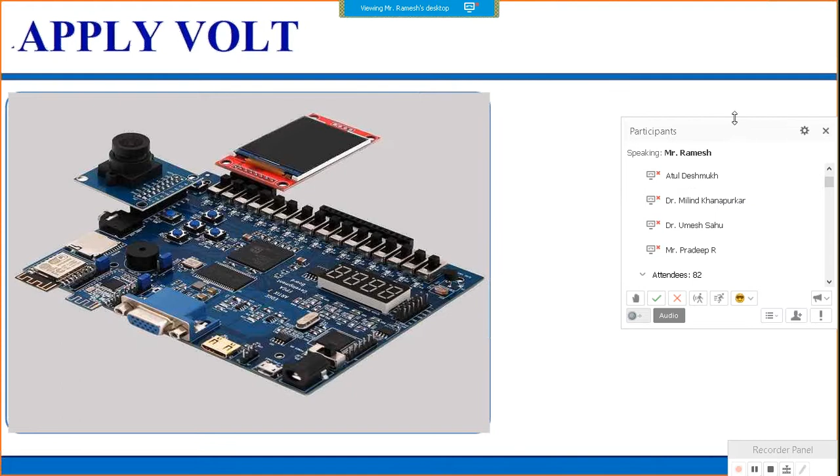And the major advantage, when we compare with Digilent and Xilinx boards, is warranty - that is a major issue - and the other is the peripherals. The third part is DAC and ADC, both present on this board. And on this board we have 3 flavors: one is Spartan, other is Artix, and the third one is Zynq.

And LoRa is one thing which I was just about to tell you. This is one of the products which we have designed in the month of June, using Raspberry Pi, FPGA and LoRa solutions. We have implemented this in our office, as well as in most temples, malls and airports.

Initially people were not ready to go for it, but we told them, okay, maintaining the distance, an alarm goes off, and you get alerts for those who are not wearing a mask. So everything is noted. Recently we have uploaded the thermal part also, which within 6 feet of distance will tell you the person's temperature. I won't say it's 100% accuracy as of today, but 90 to 95% accuracy data is coming.

We have already implemented this in a couple of municipal corporations in different cities like Vijayawada, Vizag, and in some hospitals. This completely uses the LoRa technology.

This is one more thing, a LoRa-based animal tracking system which we did 1.5 years back in Madhya Pradesh, in one of the forests, where near the fencing so many animals come in, and sometimes electric circuits are given in the fencing to deter them. To avoid that, we have given this animal monitoring using LoRa technology there. We have put it on a trial basis, expecting something good should happen. This was our effort for the last 1.5 years, which we've been showing to people.

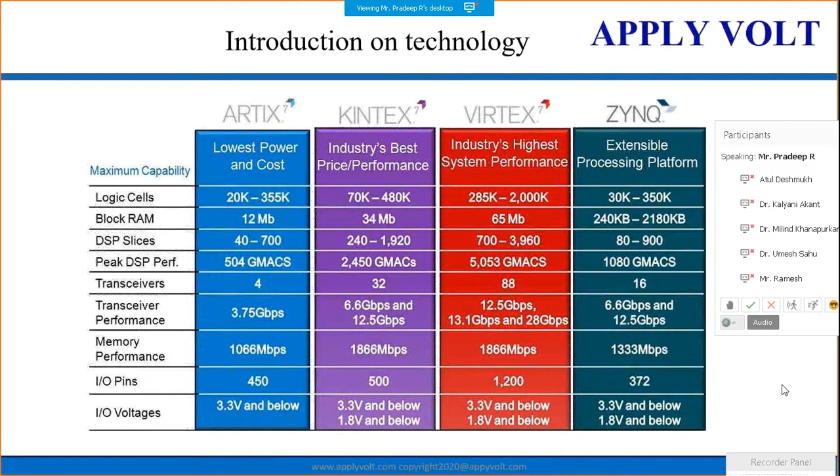Every 18 months, we are concentrating on increasing the device in terms of area point of view, we can take it 2 into 2. For example, if you take a die with a dimension of 2 and 2 nanometers, you can identify that in terms of nanometers. Here, the die size consisting of 2 into 2 is a square base. In that, you can fit certain designs, like full adders or full subtractors, or you can include microcontrollers or microprocessors.

After 18 months, what will happen? The die size must remain the same, but you can fit into it 2 parts, one microcontroller and another microcontroller. We are having 2 microcontrollers by using another 18 months or 2 years. This is defined by Moore's law, so the reason behind that is the technology file. That's why we are concentrating on present trends in 7 nanometer technology files.

So coming to that, by using these 7 nanometer technology files, which are very low-end technology files, what are the different changes in our FPGAs that have happened in the past 10 years? We can concentrate on the architecture of FPGA boards or FPGAs available in the market. So these are the different technology files.

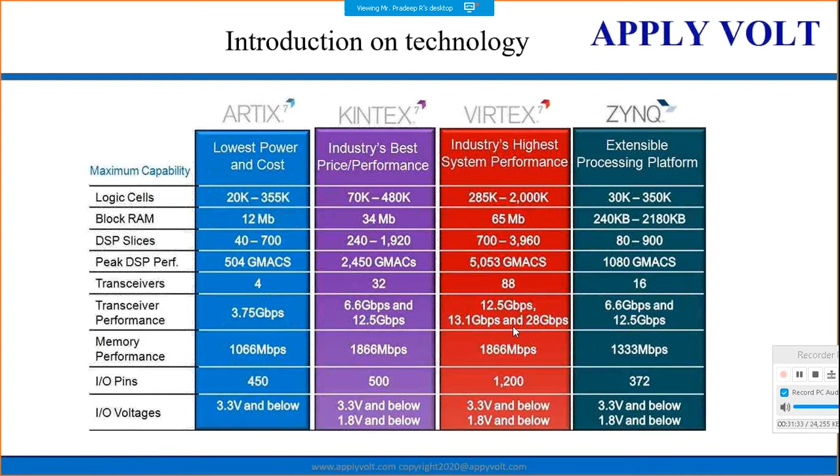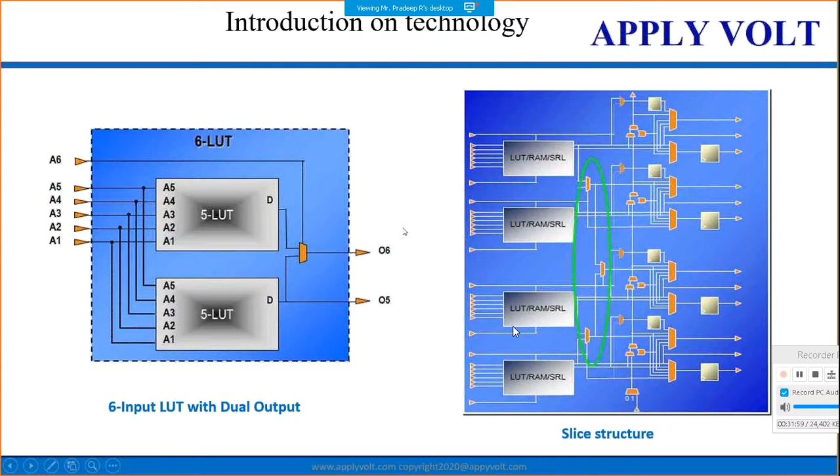Coming to DSP slices, why are DSP slices very important in FPGAs? While performing image processing applications, signal processing applications, noise applications, or video processing applications, we need certain registers to store and retrieve data using this DSP application. So we have a dual port DRAM register and AB registers, another type of multiplier for 25 into 18, and an adder multiplexer. ALU is also available, along with mux, counters, registers, and carriers. Using these fundamental bits, we support our design in terms of DSP slices. So the configurable logic block consists of both DSP slice type and logic slice type, as we can call it.

So these are the technologies inside the FPGA that we are focusing on. We are always focusing on ZedBoard, which is one of the best boards available in the market. It is good for applications like SOC, system on chip, because this board consists of both logical resources and system resources.

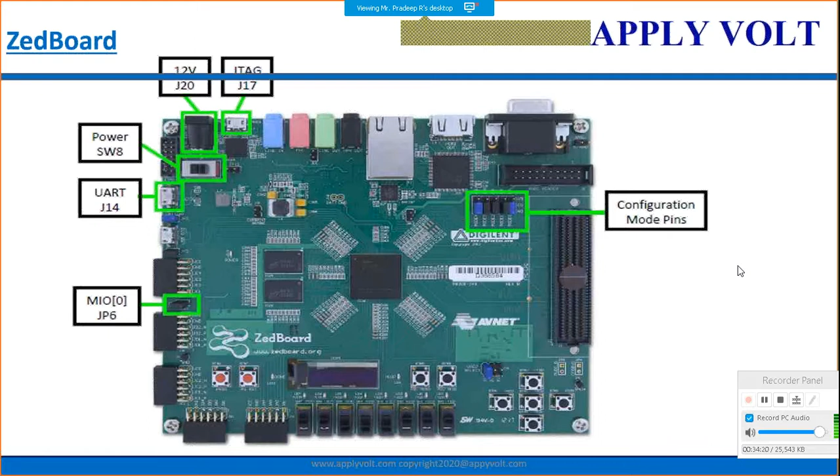That means PS and PL, processing system as well as programmable logic. One of the programmable systems is constructed using ARM Cortex A9, a dual core processor, and the PL system is constructed using an architecture of Artix 7 and Kintex 7, as we saw in the previous slide. These PS and PL communicate using an AMBA architecture, that is AXI4, which is used for prototyping applications, for the communication between both PS and PL.

So what's coming up here? We are starting with where to start and where to end. So I'm giving some individual steps, a design flow, you can call it as design flow.

You can see what is what and where to end and where to start.

Initially we want to identify our problem statement, that means what we want to design, what type of application we want to design. For example, edge detection, pixel clarity, or enhancement of the image. Like that, you want to identify what is your problem statement.

Later on, we come to define our verification by using different architectures and applications. What are the verification domains we want to do initially? For M codes, like MATLAB codes, you want to write your own MATLAB code for your different architectures or problem statement.

And you verify that the enhancement or design is properly working or not, also by using another type of module like Simulink modules, where you can easily drag and drop your Simulink block set and enhance your design. This type of analysis is very important.

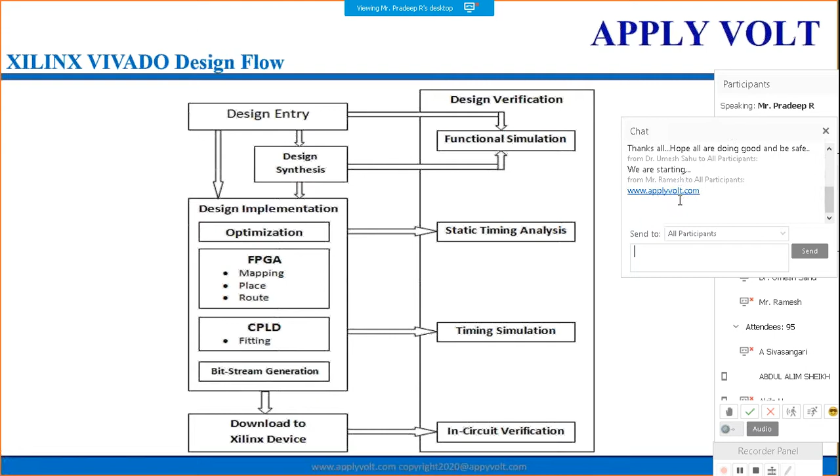design flow of Xilinx. So we are concentrating on these steps for the coming lab.

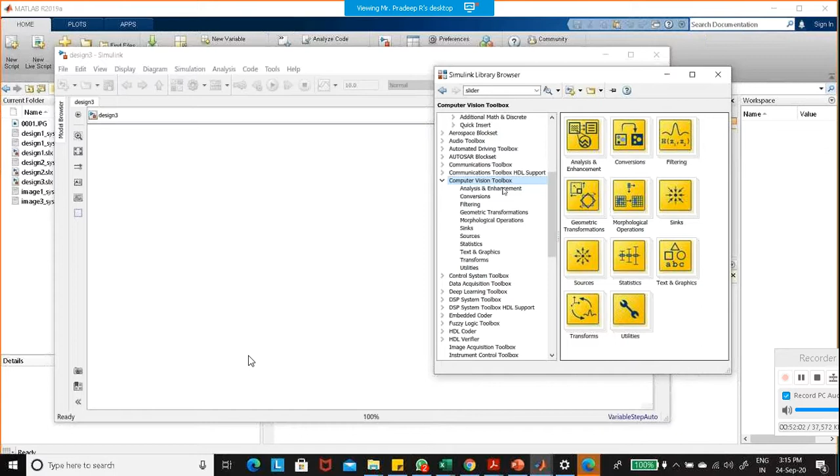In that toolbar, you want to give in some source, meaning you are giving an image. In the source window, you go for Image From File.

You take this toolbox, drag and drop it. Now the image block has happened.

Later on, since the image is in terms of rows and columns, like 128 by 128 or 750 by 750 RGB color image, for the resizing purpose, you want to go for resizing.

Why am I going for resize? Resize is very important because I'm giving a certain image in a bigger manner, and I want to convert that image into a different form.

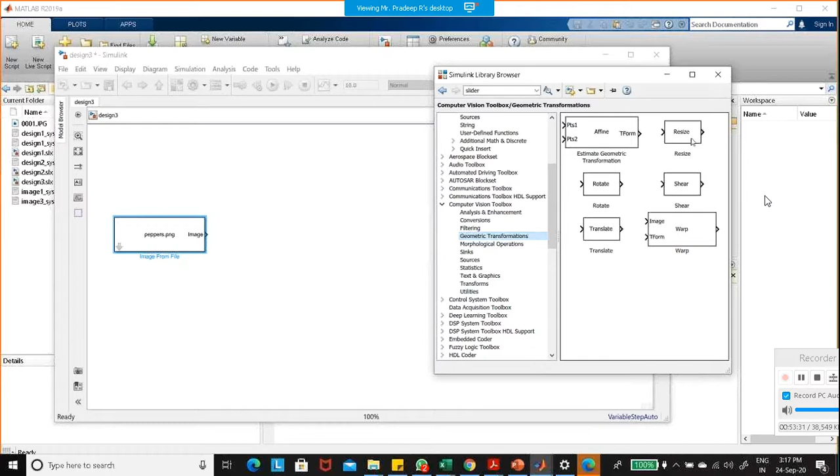So in the same Computer Vision toolbox, go to Geometric Transformations. There you have Resize, so you can take the Resize block.

After resize, you want to go through the conversion, because the image is in 2D. For the conversions, this exists in the same toolbox - you go for the DSP toolbox.

In the DSP Toolbox, there is Signal Management, and within that, Signal Attributes. In there, we have two types of blocks: 1D to 2D and 2D to 1D.

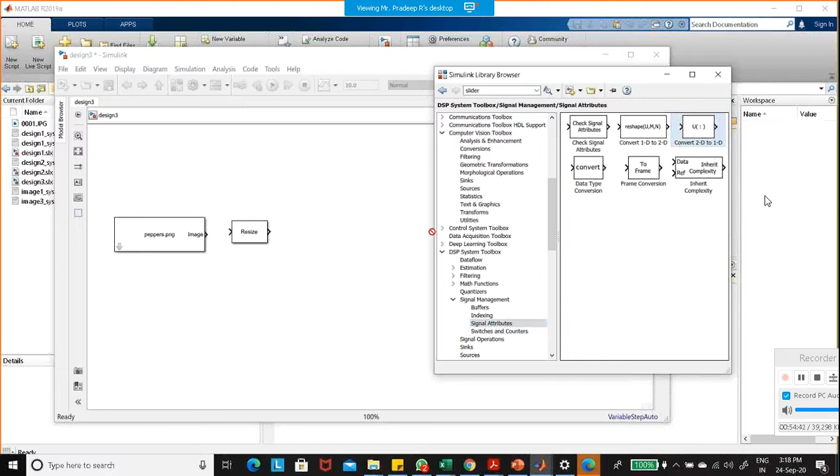I require both these blocks - one for 2D to 1D, another for 1D to 2D. One goes in the pre-processing block, the other in the post-processing block. So I take one here for processing, and I also take the other right now for the post-processing block.

After that, in the same attributes, we have a Frame block. I want to transmit my image frame by frame, so for that I'm using another block called Frame Conversion.

Later on, I want to use buffers - Unbuffer and Buffer. These hold the entire sample of data. For example, if I give a resize of 128, the entire 128 comes directly into the frame.

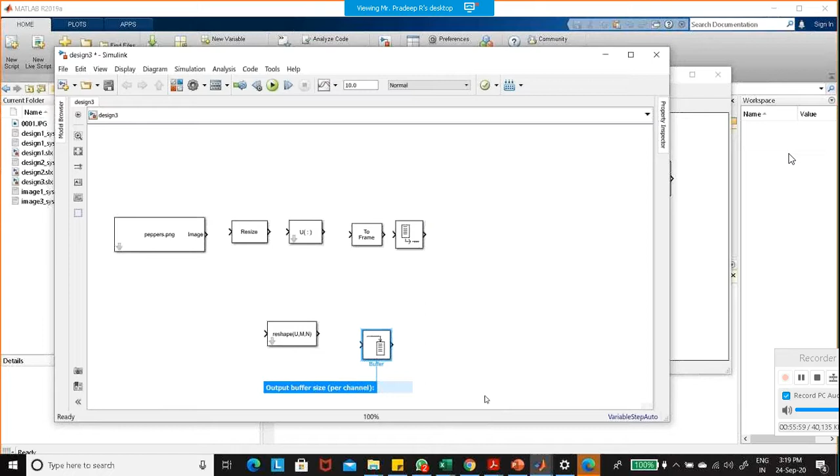The frame is directly sent to the input, but the input cannot capture the entire data at once, so it will hold a certain amount based on the resize type. That's why I'm using a buffer - I require another type called Unbuffer as well. That is only the buffer, and it is in the pre-processing block.

Later on, you can make a simple connection directly - this is my pre-processing block.

Now that the processing block is completed, what's the next step? You want to make a certain algorithm. So here, I want to do the algorithm in terms of addition - I want to add a certain constant value to my image.

For that, I am going to the library. The algorithm has been designed using Xilinx System Generator, so I am going to the Xilinx toolbox block set. This is my Xilinx block set.

When you configure the Xilinx Vivado to MATLAB only, this block is available - otherwise it's not. In that, going to the Basic block set, I want to take my input as well as my output. These are the two things I want to drag and drop.

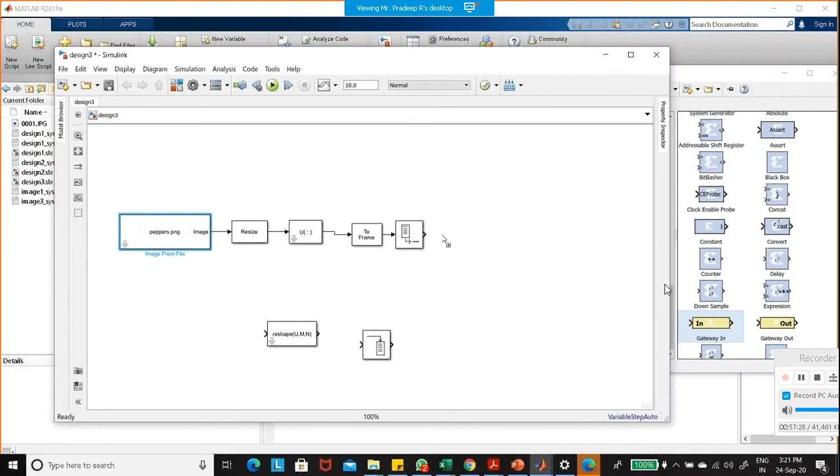So this is my input signal and this is my output signal. So in between input and output, what I want to perform? I want to perform adder.

So for the adder block, where is the adder? Actually, adder is in terms of math. In math library, we are having adder subtractor. This is my adder. So I am taking the adder subtractor block from the math library, and I am giving the connections.

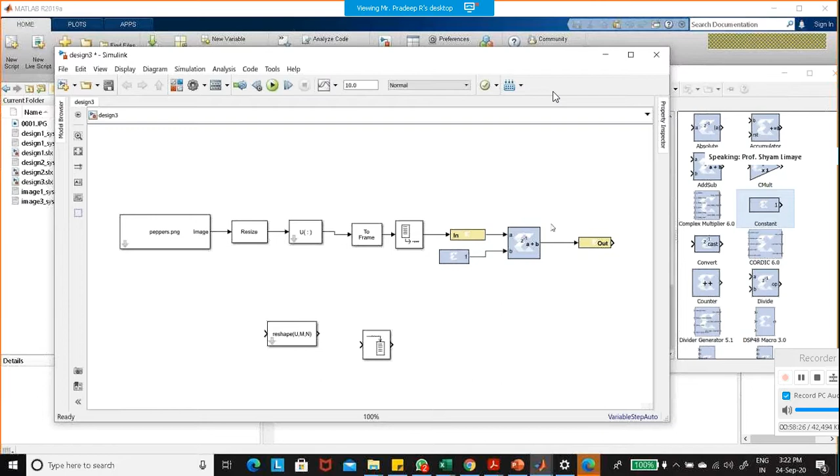So later on, I want to take the parameter also. I want to take the constant also. So this is my constant, from the same math library. Some connection here, so giving all of that, I completed my second block set, that is system generator.

I want to perform an algorithm in terms of adding some noise or some signal to my design. And later, I want to perform a post-processing block.

So for the post-processing block, I am already having one buffer. So what is the data I am having? The same data I want to unbuffer it. And I want to retrieve the values from one form, 1D to 2D, because I want to view the same image in terms of 2D form. So I want to retrieve it.

And I want to view my output. So the output is also existing. Going for that, going for that computer vision toolbox. In that there is a sink is there. In the toolbox we are having a video viewer. So take this toolbox and you can give it in the output side.

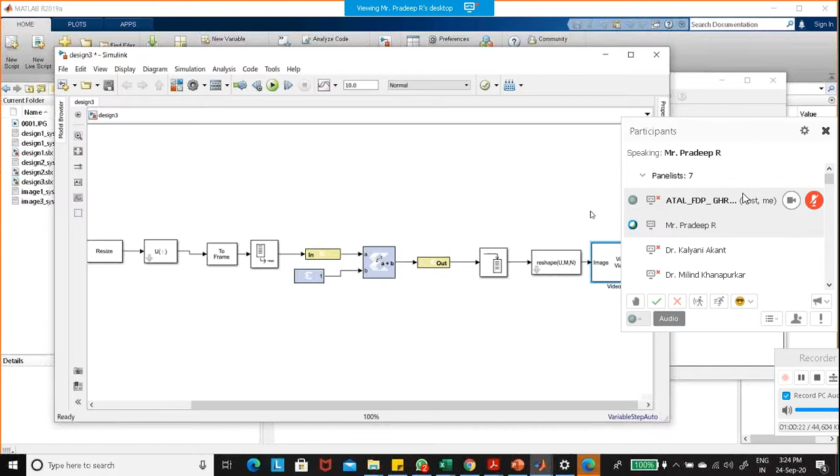Right, so this parameter, devices and everything we can connect. But in between, we also connect that data type conversions, because what is coming to you, what type of data is coming, in terms of binary form or in terms of radix form, like that. So for the confirmation, you can go to that.

So the signal attributes here, in the Simulink there is a signal attributes toolbox. In that toolbox we are having data type conversion. So you can take that data type conversion also. It is attached in between the output port and as well as the buffer. So I want to add this block also.

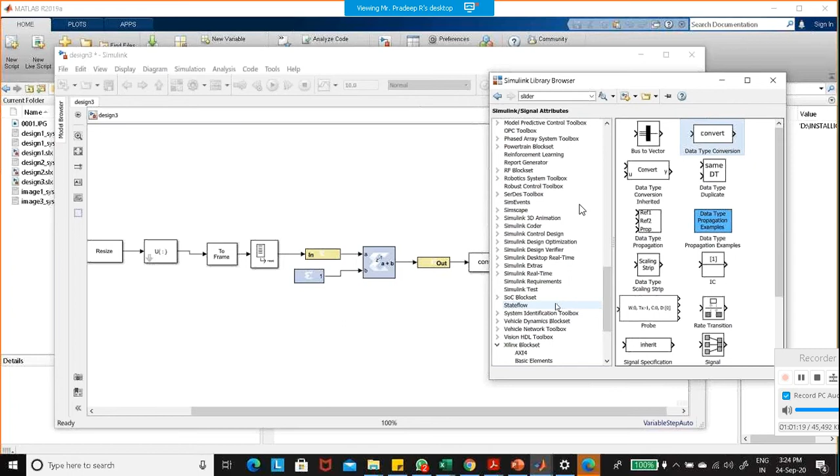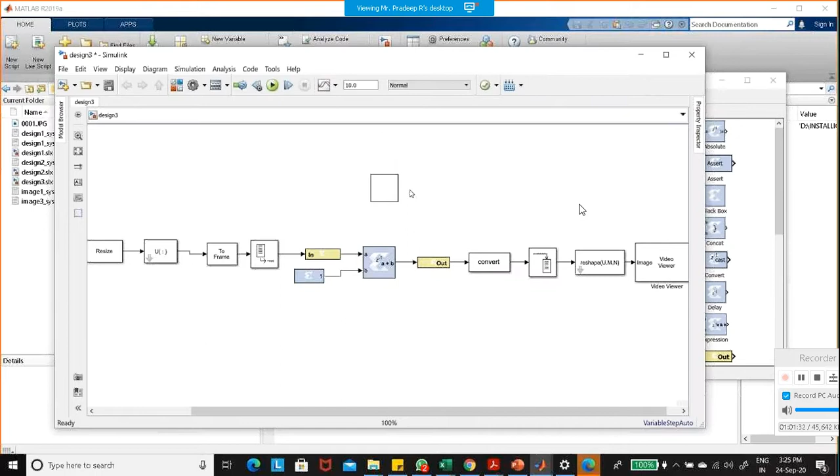Right, so this is my actual block. Meanwhile, I want to add my system generator also. So the system generator is existing in where? Actually, it is existing in the Xilinx block set. So in the basic block set, there is a name called system generator icon. This is the thing, all the operation has been done by using this block. Okay, system generator block, this is the compiler block, you can call it, or specification block, call it. So, okay, very good, fine.

So I want to view what are the individual parameters I want to insert right now. So I want to insert some image here. For that image, I want to make some resizing here. After that, I want to convert from 2D to 1D. After that, I am giving it in terms of frame by frame.

Frame by frame. Later on, the unbuffer is also going to the input side, and I want to add some addition or subtraction. Later on, I want to replace the data. So what I want to do? I want to take another image file, Control C and Control V.

Yes, this Control C and Control V. What is the input and given? I want to view. So for that input purpose, I am viewing the viewer here, video viewer here. So you can open and change the parameters for the design, okay.

So when you click on the image from file, the from file is mainly consisting of file name and what type of data it is. And actually, if you change the image signal in terms of separate colors like RGB, you can use the R to one type of signal, G to one type of signal, and B to another type of signal also. But I am taking right now, it is in one multidimensional signal. That means I was taking the entire data, and I am browsing my file.

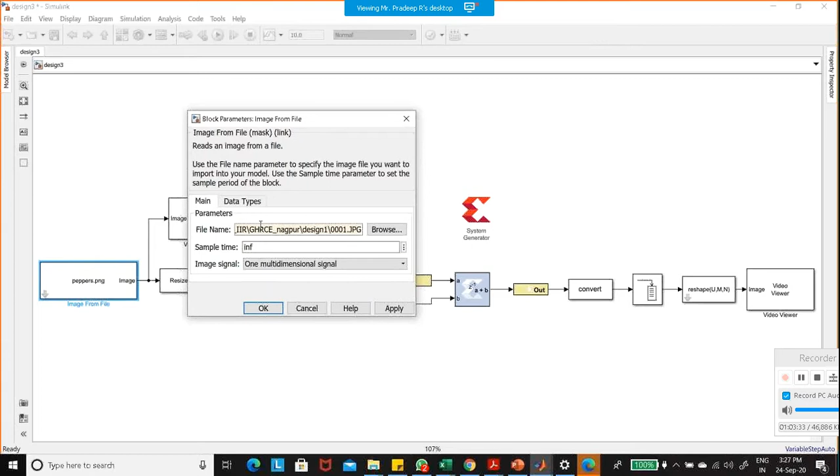That means I am giving my image file here. So I am having one image here. I am taking the same image. So then I am applying this one. Later on, I want to change my data type. Because data conversion is there, I want to choose what type of data conversion.

I am using the uint8 data type here. And now, after completion of this block, I want to go into the resize block.

So here, the resize block is consisting of so many specifications. You can identify specifications like the number of rows and columns, what you want to display, and what type of image wants to come into the screen. So I am taking the rows and columns of the image.

So here I am changing my value into 128. Rows means 128, column size is 128. Like that I am changing here 128 and 128, and you can apply.

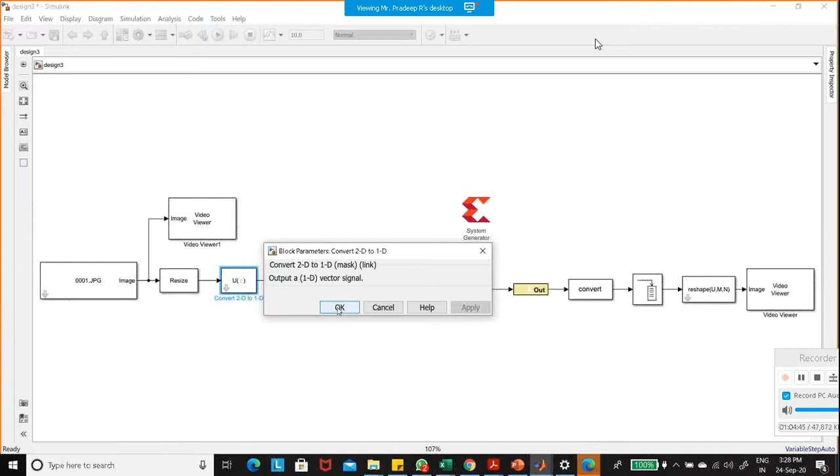So these are the same things because you are changing the vectors in terms of 2D to 1D form, and the frame size is also okay, frame by frame. But coming to the buffer, how much of data you are taking? So what is the size I given for resize?

The column size is 128. So you are taking the column in terms of two columns, rows and columns. It is 128 into 128. But coming to the unbuffer, I am only having to insert my data or insert my information of pixels in terms of 128 form only, because the frame I am giving is 128. Insert it 128 and click apply.

Okay, then I want to change my input gateway in. What is the gateway in I want to conversion? Yes, I am using for fixed point in terms of unsigned integer, and it is in terms of 8. So for 8, that means 8 bits, you can consider it as an 8 bit, and click OK and OK.

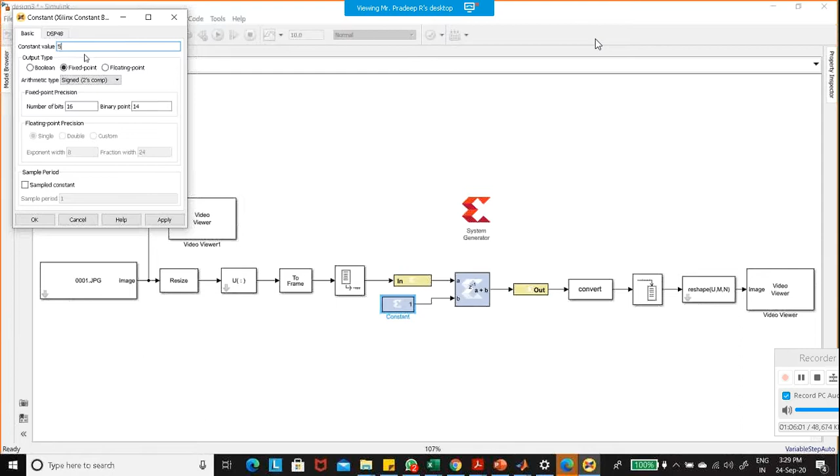Apply and OK. Okay, if you want to, I want to add some constant as I mentioned previously. The constant is maybe right now I'm taking 50. Later I can change any value according to 50 or some factor. You can easily identify, and also it is a fixed point, not a floating point, and it is a type of 8. I'm taking an 8 unit.

Okay and OK. And I'm adding here, and add only adder. If you want to take the subtractor or add a subtractor also, no issues. And I'm not using any delay here. Latency means here the delay, Z power minus 1. That is a latency. It is having 1 unit of delay.

So I'm taking it as 0. I'm not applying any delay right now. And the output, I'm not changing any output right now. It is only the same thing. Click and OK. Now, what about the conversion? Data type conversions, what is it?

So if you are going for the data type conversions, you can see in the property window you want to identify the output data type, what type of data it is coming, or you can take it, you can identify. So the data type is in terms of uint8, and it is a real world value, and you can take it as a round. Okay, click apply and OK.

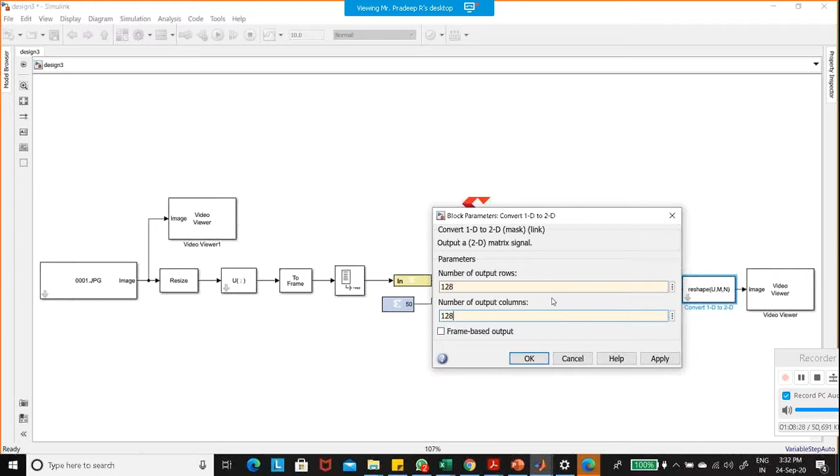128 rows and 128 columns. 128 rows and 128 columns. And click OK. So I want to view my output in terms of 128 into 128 form.

Then I want to save the design, because all the changes have been done. Still I am not using my system generator right now. Okay, but I am clicking on run to verify whether the output is coming or not.

That is going on, processing simulation is started. Yeah, everything is all in input and output. Yes.

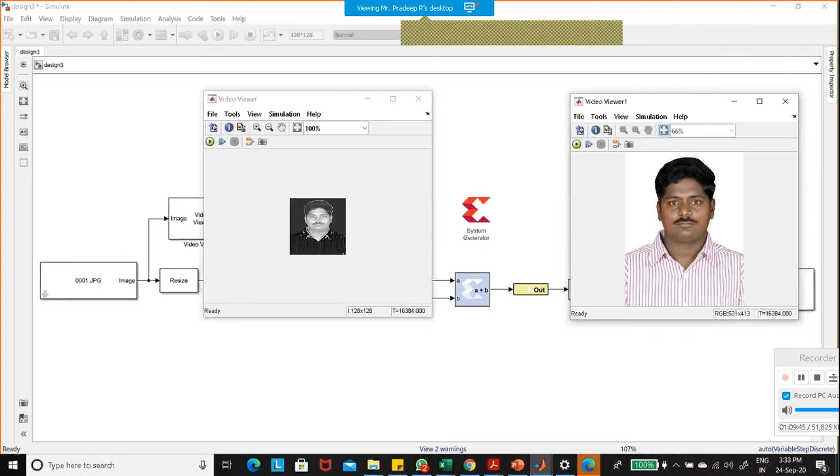Yeah, very good. So actually this color image, you can observe that this color image, what you call the actual RGB size, what is the size here? It is 531 into 413. This is the size of my image, and what I'm retrieving on the output side, you can see the retrieving of the output image. What is the resize? You can observe that 128 into 128.

Okay, so here you can see the size here, 128 into 128. So sizes have been taken.

The same size has existed here. If you want to change something different, for example, I want to invert my image - yes, you can invert your image. I'm giving some small examples very quickly here, and later on I'm going to the FPGA implementation.

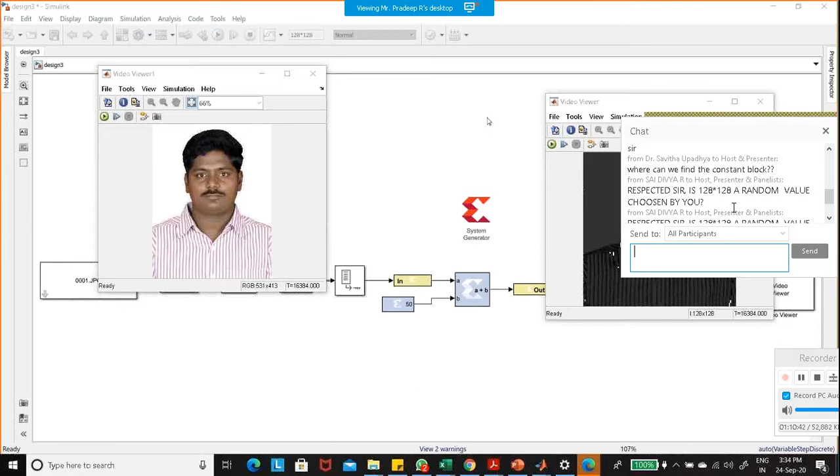From Sai Divya - yeah, ma'am. You can take the random value, like 64 into 64, or you can take anything according to your size. First of all, you want to know what is the actual image size. My input image size is 531 into 413, so that's why I am taking it like this. You can take it like that.

How can I run the MATLAB script into FPGA? I'm coming to that example, sir. I'm showing that - give me time of 1 or 2 minutes.

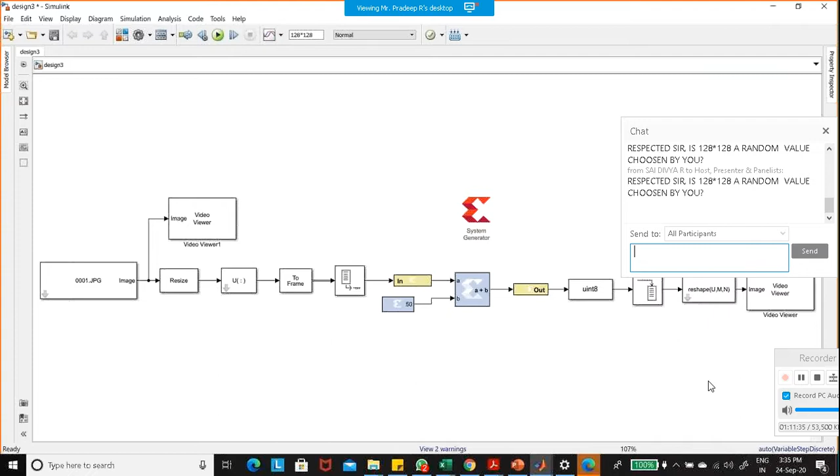If you want to see some other applications, for example, you can take that inverter in place of adder. You can take the inverter directly by using your block diagram library in that Xilinx worksheet. We are having an inverter here - where is the inverter? Just a minute, yeah, this is an inverter.

You can take the inverter, then use another type of application. For example, I'm taking that inverter, showing a small example, and I want to implement it in FPGA. For that, I require the input control C and control V - same things I'm using here also, and I want to use the same input signal and output.

I want to use the same data here. So I want to see how many images right now - I want to view 3 images: one is the input image, and 2 are output images. So for the output images, I want to change this property also.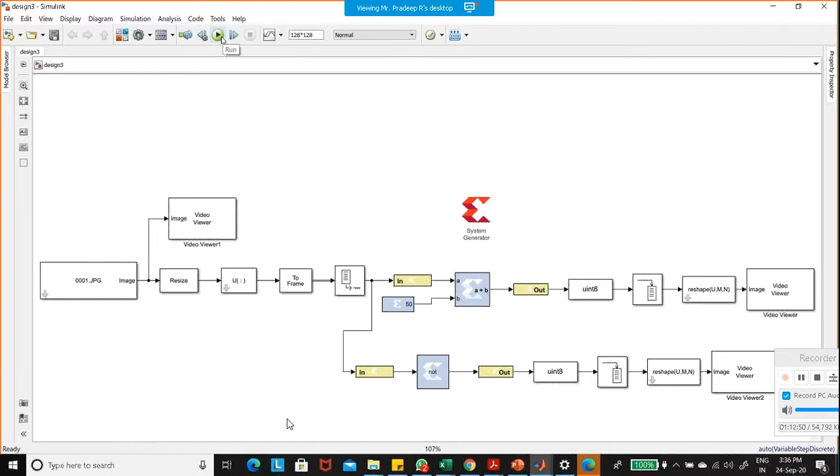It is only inverter, but I am not taking any delay - it is 0. Click apply and OK. Now again I want to save this design and rerun the design.

You can see this is our first image. When you added, how much value did you add? 50. Okay, you added a constant value of 50 to the original image - that's why the image is coming like this.

But what I'm doing in the next viewer, I added an inverter to view my actual image inversion. This is my inverter, this is my inverter. Okay, fine - so like that, you want to change your algorithm.

You want to change your algorithm manually, or you can take an XOR gate, or you can take RGB. For example, I'm having a color change and gray code conversion, like what do you call it?

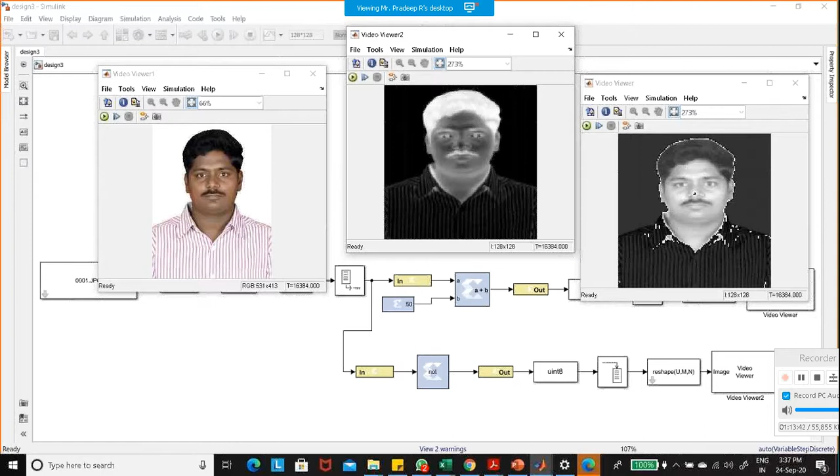So Y is equal to 0.3 into R - first, you can take this as R, plus you can add in terms of 0.59 into G, plus you can take 0.11 into B. This is one type of equation for the gray code conversion.

For this equation, what you want to do is identify that 0.3 is multiplied with R. How many inputs do we have here? The input side is RGB. R is multiplied with 0.3 - you can remember this equation.

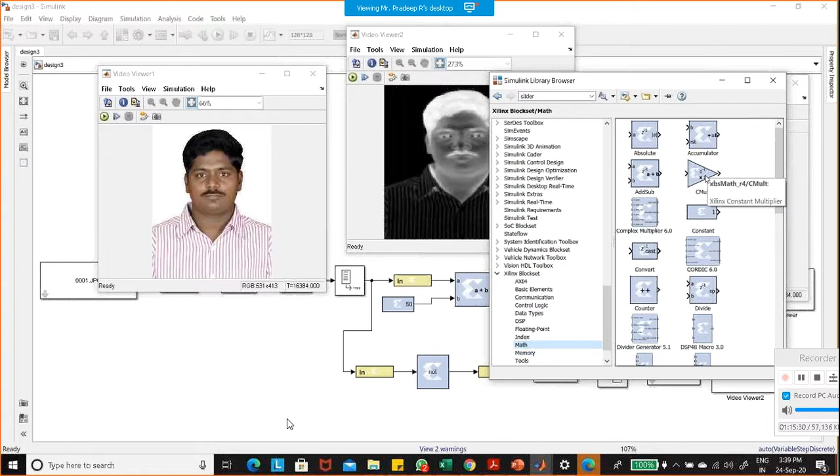By using CMult, in the additional block we are having a CMult for multiplication. If you want multiplication, 0.3 into... plus, what is another value? 0.59 plus 0.11 - you want to add the three values. For adding the three values, you want to take CMult as well as adder. These two block sets or toolboxes are sufficient for the gray code conversion - you can easily generate it.

So, very good. Coming to that, I am doing right now directly the FPGA implementation. I am connecting my FPGA board to my design, my system.

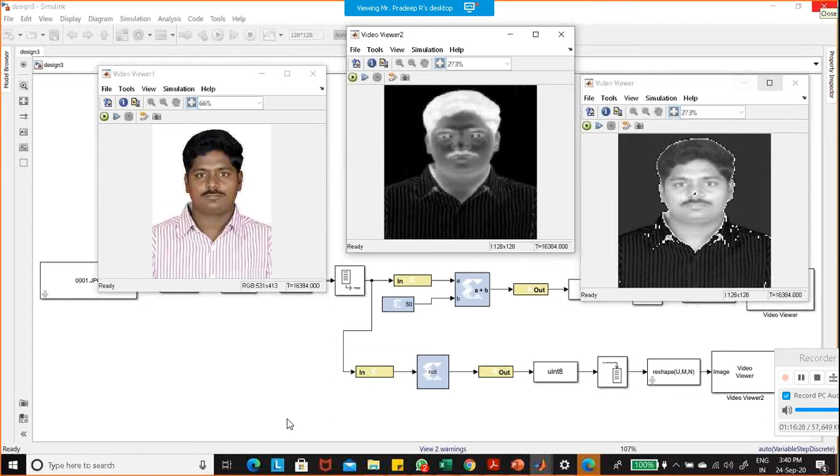I am connecting my ZedBoard. What I showed as the ZedBoard looks like this - in the previous slides, yes, this is the ZedBoard I am connecting. I am connecting the power cable and the data cable to my system - power cable to the platform and data cable to my system.

So then I want to turn on my system - I want to turn on my board. Then the connection.

JTAG is a programmable port, and we have another type of port, which is UART. For UART communication, you use the UART port, and JTAG for programming purposes. You can customize this.

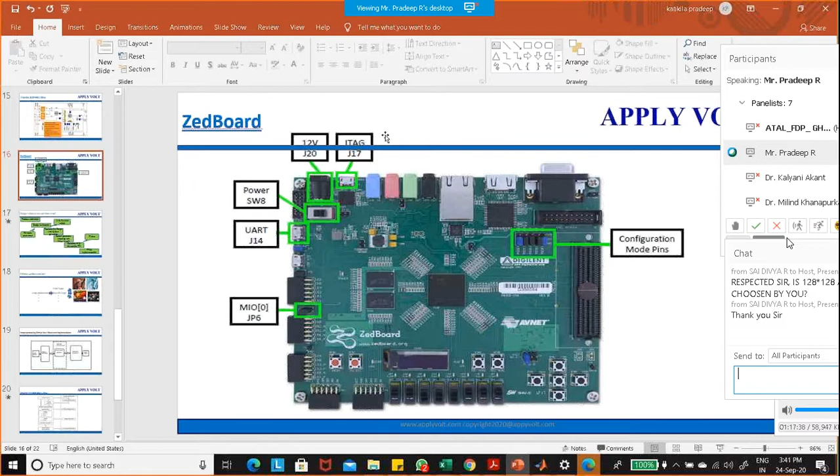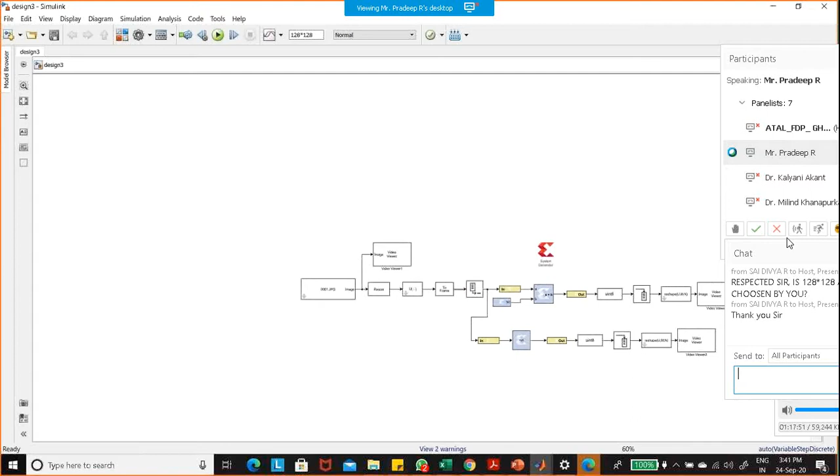This output information, now I want to view. So I am removing that inverter also, this inverter. I want to remove this, just deleting. Now I am using the board.

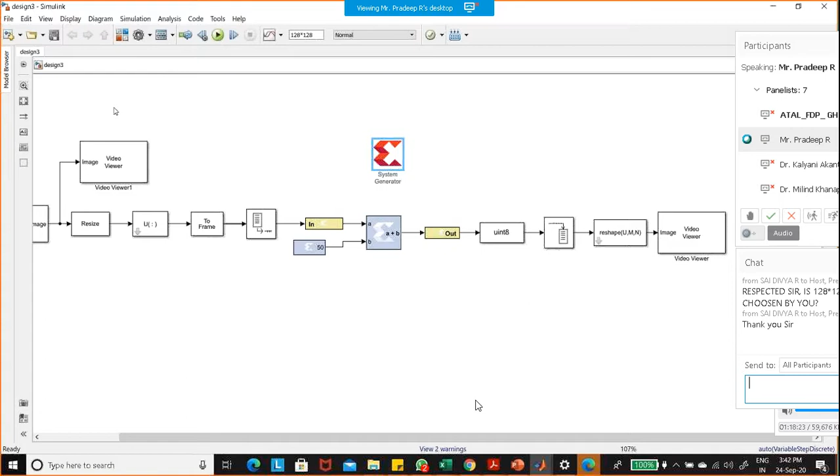How I am using the board you can see. Going to the system generator icon, double click on that. Meanwhile, I am saving once again because I removed the design now. I save that design and double click this system generator.

So now I am choosing the board. I am choosing a board. The board is in terms of ZedBoard. I am choosing the ZedBoard, it is an evaluation board. So I choose a board and it is a type of...

Compilation type I am taking as hardware co-simulation JTAG, because I want to get the output here itself. So this is selected as JTAG. If you want to take VHDL or Verilog, you can take your own language, whatever you are familiar with, no issues. But not much change has happened here.

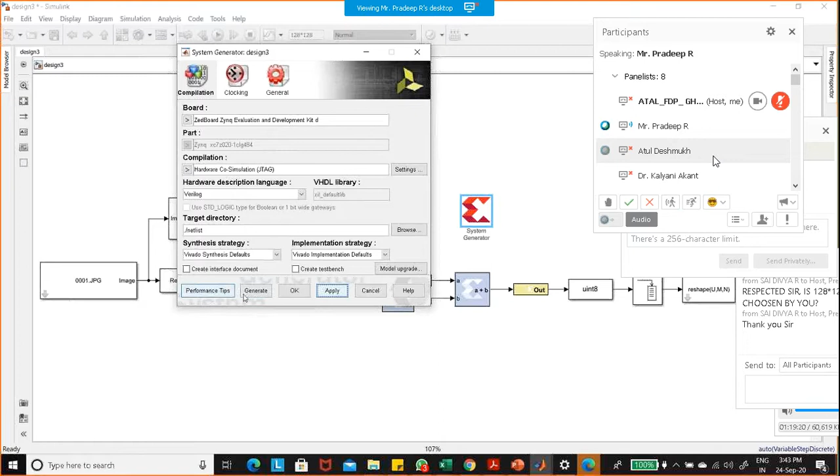Then now I am clicking apply. I take the JTAG and select on my board, and I am clicking generate - apply and generate. So for the generation, it is going to start your system generator performance.

It will take a while, hardly around 5 minutes I think, because it's a very small design. If you go for bigger designs, it will take around half an hour also.

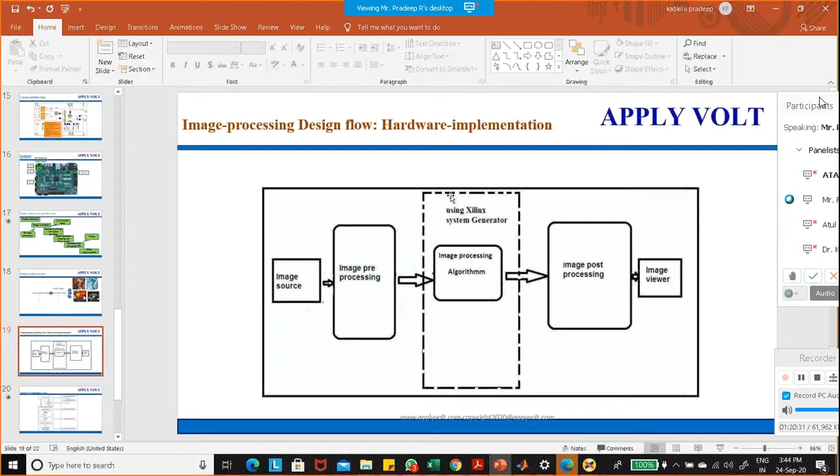So this system generator gives you that toolbox only for the algorithm part, because the system generator is related to your Xilinx toolbox. That is the most important point we want to make sure of.

Question is: CNN, what is the exact abbreviation, sir?

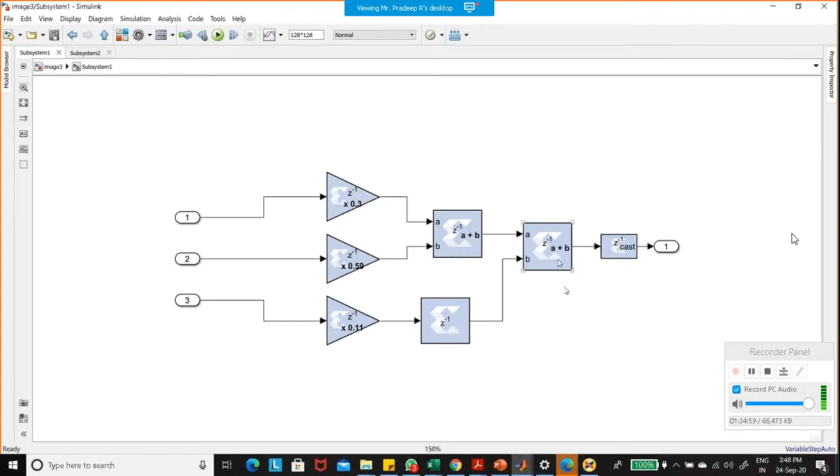So this is another type of the same design I'm taking here, but here I'm taking one example as RGB. What I mentioned, the equation is 0.3 and 0.59 and 0.11, and I'm adding here. How I design this, you can view this output here.

For this addition, I perform some different operations - direct gray code - and I'm adding some threshold here for thresholding purpose. I'm using this block, and I'm adding some noise here with respect to certain constants, and again adding something constant. So I want to wrap this to view your output, how it looks like. The same module uses pre-processing and post-processing blocks.

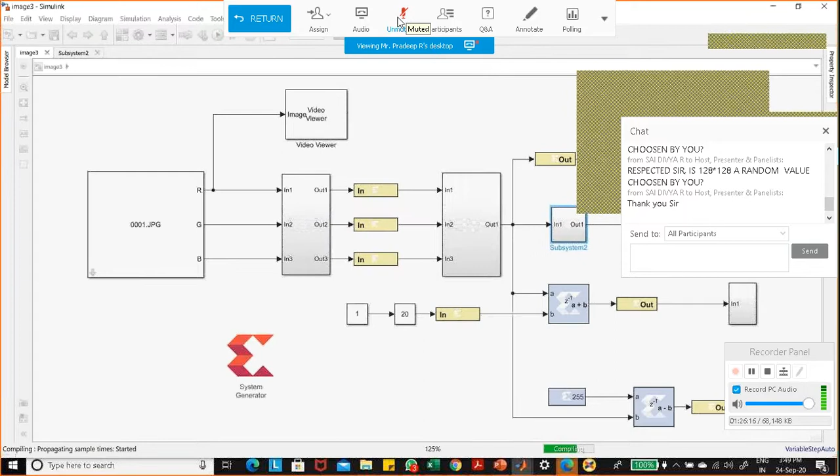That I know. No, but that is not to me. Wait a minute, let me host. Neural networks, it's from neural networks - convolutional neural network. Sir? Convolutional neural network. Yes sir, it is also possible.

What you want to do in the convolutional neural network - with the blocks or designs you are having, you want to identify the blocks near the Xilinx blocks. You want to identify the Xilinx blocks, then only you can enhance your design in the neural network with respect to an FPGA. Yes, in a certain way it's possible.

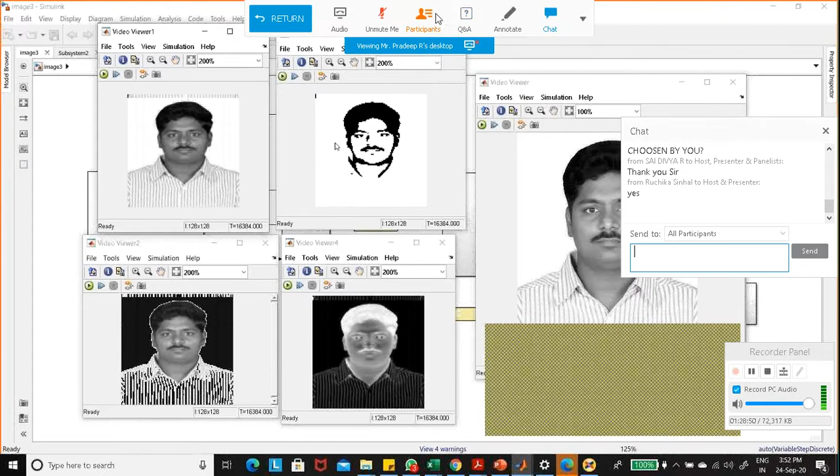And this is the addition value, and this is an inversion value, threshold values. These are the threshold values existing here. These are the parts we are mentioning here for the same design.

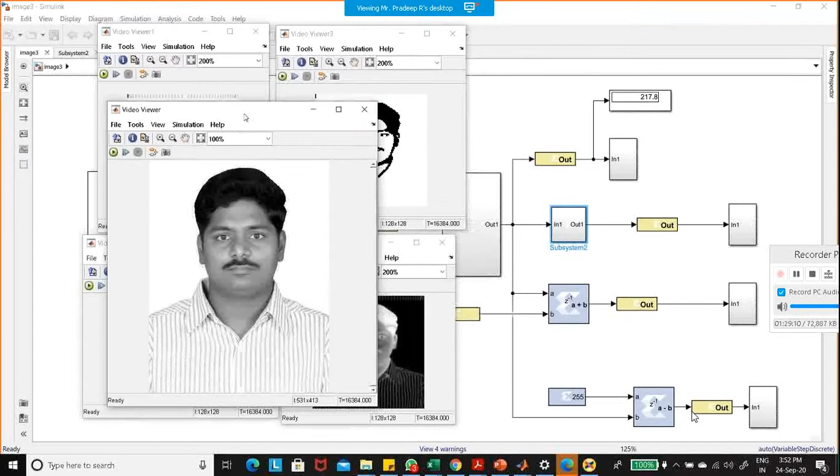This is a system for threshold. So the threshold is given as 2, I think. Yes, 2 is the threshold. This is the threshold, and I want to see what is the threshold. View 3 - the 3 means threshold.

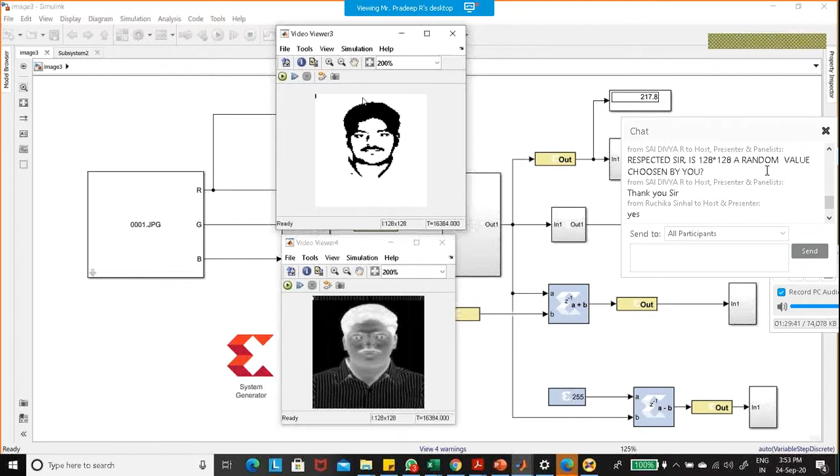Where is 3? Yes, 3. This is 4. This is the threshold value. Okay, this is the threshold value for that design. You can easily identify it.

And the processing block is coming. So, any more questions, sir, from the participant side?

Meanwhile, we can discuss things because the compilation is still going on. This is the last step - I'm waiting for that block to generate. After the generation, we want to directly jump into the FPGA and view the output. That part is pending for our friend. So the processing is ongoing.

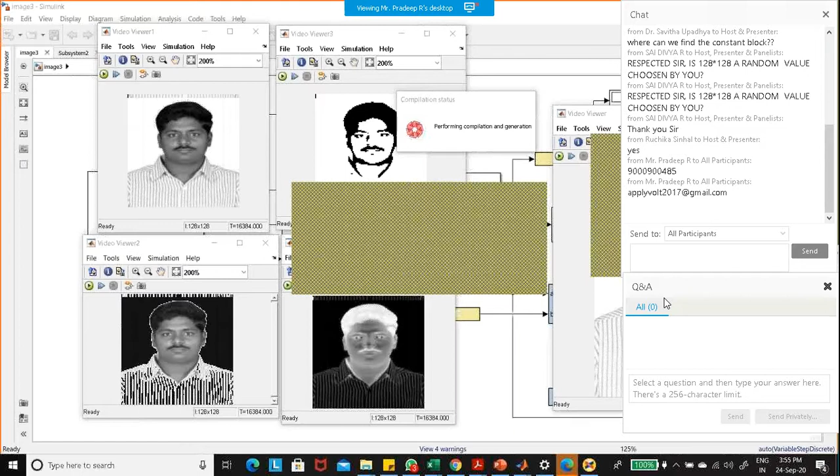So we can do our own designs based on these factors, and we can easily enhance the design.

Mr. Pradeep, there is one question. Yes, sir. For where we get the - what is Xilinx in Simulink?

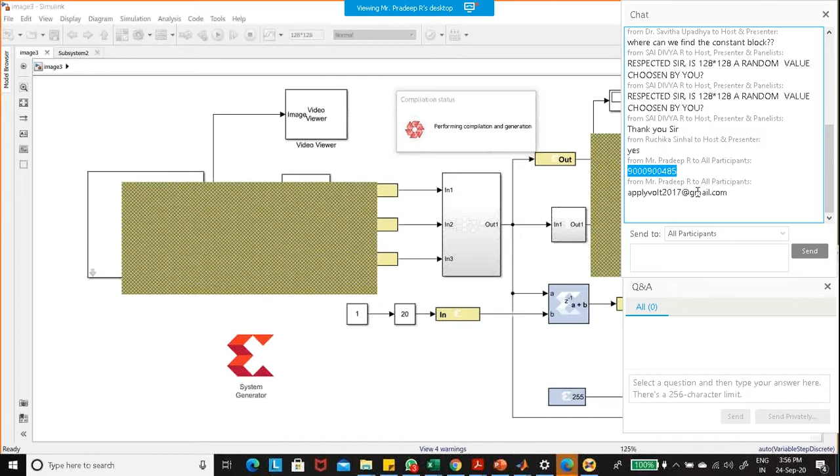Probably Ruchika, your tool - okay, Madam Ruchika is saying your tool, the Xilinx tool. You're asking about Xilinx, I think, ma'am. Yes, okay, ma'am, Xilinx is available on the Xilinx website, but it is a paid version, not a freeware.

It is a paid version. Then after that, you want to select what type of version for Xilinx Vivado - the compatible version of MATLAB you want to install. So what I did is, I am using Vivado 2019.

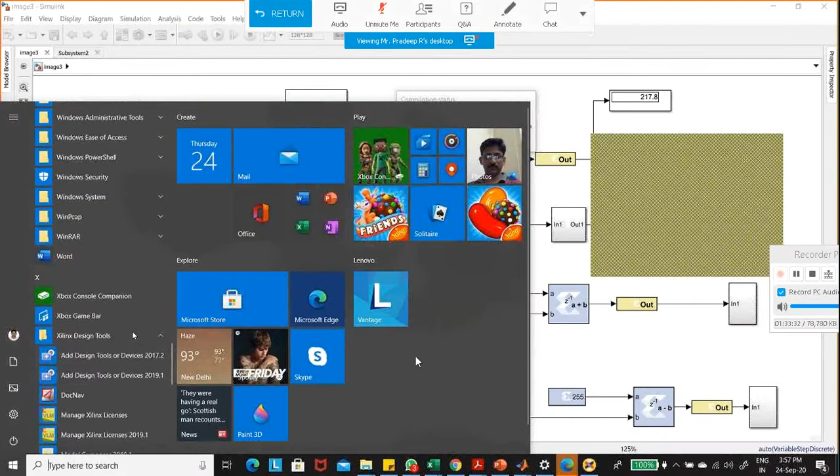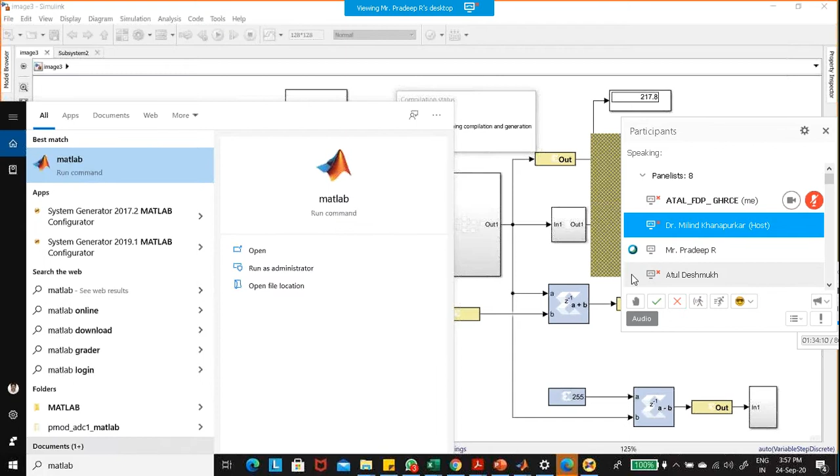Okay, I'm typing here, you can view that one. So this is the MATLAB I already installed - the MATLAB I installed is 2019.

Okay, so some other versions are available for some experiments. None of the free versions are available - these are industrial standard versions. Both MATLAB and some part of MATLAB you can search for some freeware, something like that. But for Xilinx it is not possible, madam.

Right, thank you, ma'am.

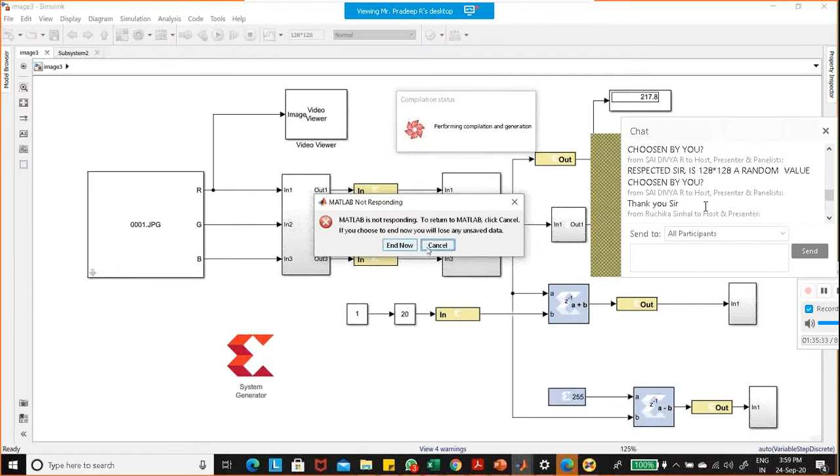So, any more questions from the participant side? Oh, it is almost completing - this compilation also must come to an end. I think it is around 60 to 70% completed. Still 30 more.

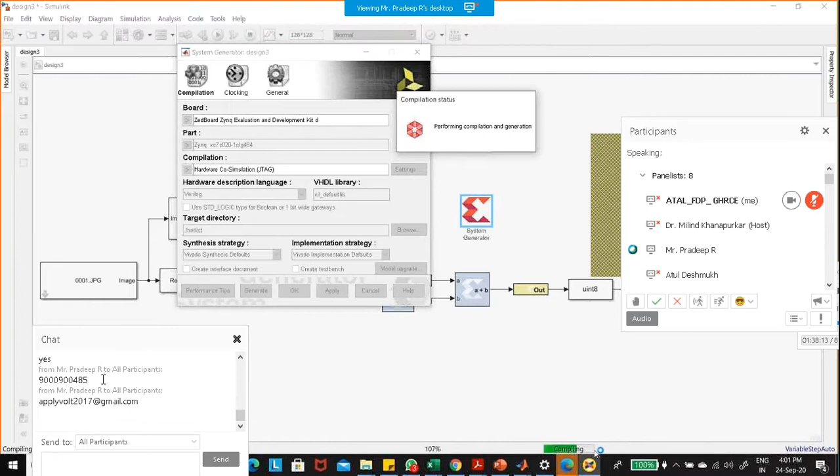Sir, there is one question in the question-answer section. Sir, nobody is asking, sir. I'm waiting for - yes, yes, there are questions. Mr. Pradeep, what is the other question, sir? Yeah, I will read it for you.

Can a standalone system be made using FPGA platform and MATLAB simulating program built in? A standalone system can be made using FPGA platform and MATLAB.

But actually, yes, probably not. What is the meaning of standalone, in your point of view? Let me know, sir, then I will give you the answer.

Because MATLAB and FPGA is one of the latest tools - these two support so many designs, part of image processing, video processing, signal processing.

Mr. Pradeep, let's get it clarified from the person who asked this question. Professor Amol, can you just clarify what do you mean by standalone system? I mean, what is your opinion - what do you want to ask actually?

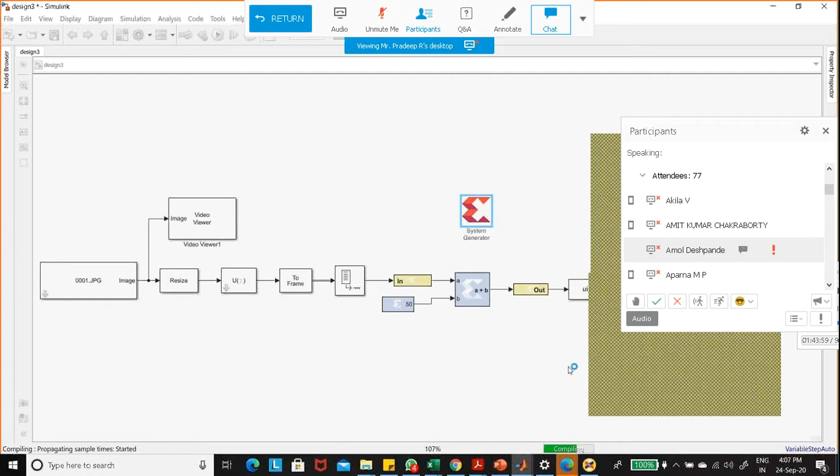So any more questions, sir? Yes, somebody is asking: since MATLAB is not a freeware, can we perform the same demo in any other open source software?

Yes, so if you're having any open source like Scilab, it is available, but Scilab doesn't support FPGA configuration, so you cannot use it for that in that software. If you are thinking of MATLAB related open source software, maybe Scilab, as per my knowledge, is there, but there is not one equivalent.

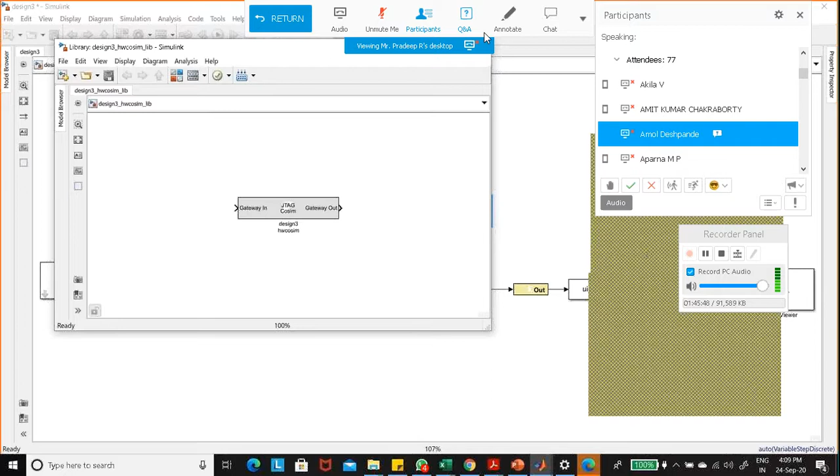Sir? Yes, yes. Is my screen visible? Yes sir, yes sir.

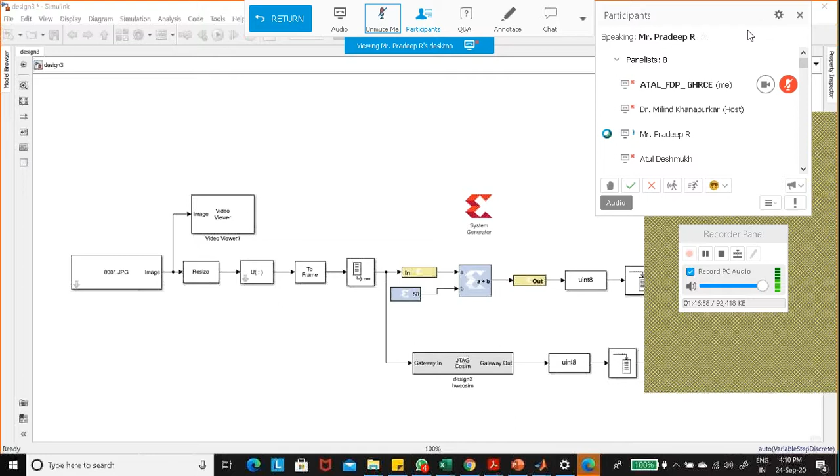Having camera - camera, where is the camera? So camera, where is it available? On your phone, beside your name, there was some camera symbol. Sir, beside your name, in sequence, it will show a camera symbol. Besides the name, sir, apparently. Yes, yes. Is it a view? Okay, very good.

So this is my hardware. For this hardware, I connected the cables into the JTAG as well as the power cable. Now I'm starting with run simulation.

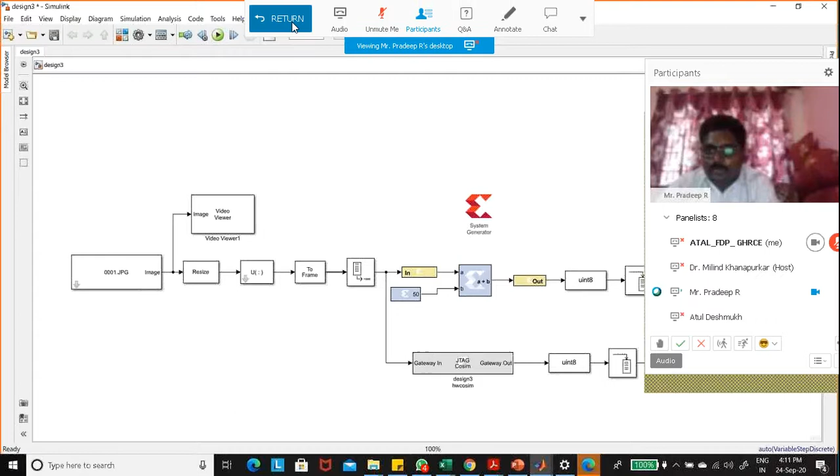For the same thing, I want to get two outputs in the same manner. What is the system giving in the same manner? For example, I want to close this one. So this is my input. Actually, system MATLAB output - this first one is MATLAB output. The second one is the FPGA output.

So I'm running right now - run simulation, it will take 1 or 2 minutes. That's it, because it is already generated. So when it is going on to implement, it will be below. Yes, the output is coming.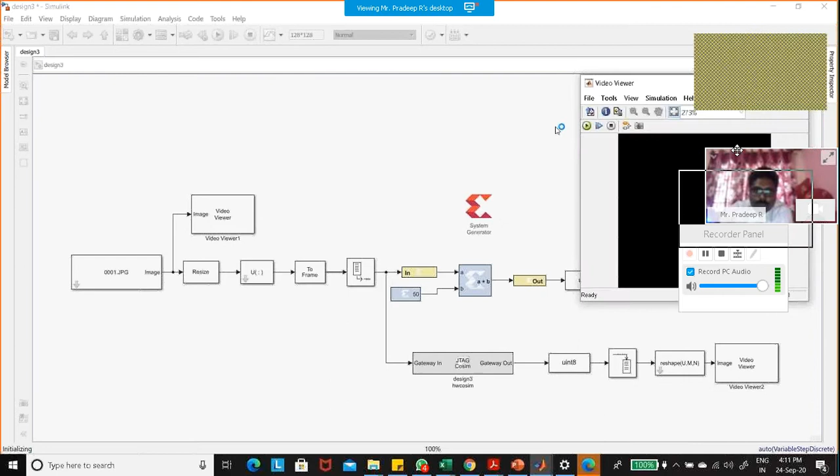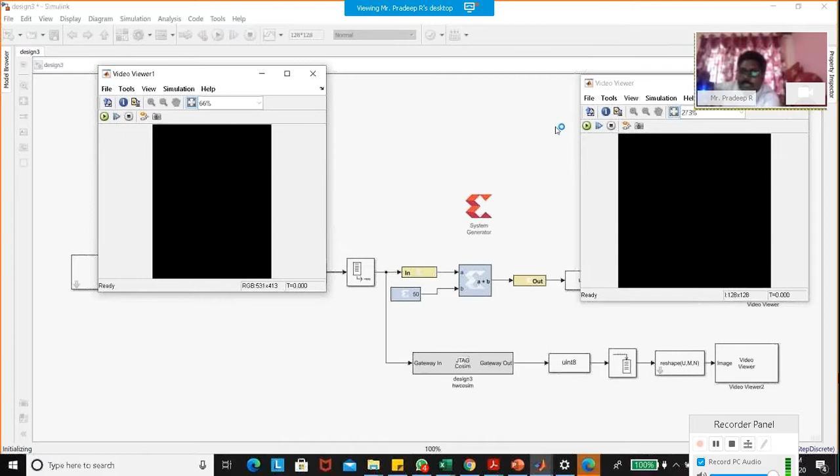Here, okay, you can show the details of how much - see, the compilation time, how many seconds it takes. Like this, it was also mentioned. Okay, you can take this one, and in the same factor, there is a thing called here automatically, different targeted metrics have also been generated.

So what is the actual location of our file? In design - yes, in design, this is the location of my file. This is the netlist. If you want to open this netlist, in that netlist you can see the hardware co-simulator. Hardware co-simulator - there is this, your Vivado project file. So in that Vivado project file, you can easily identify that.

If you want to open this icon, the Vivado icon, and go to the internal design, then you can easily identify the power constraints, easily identify the area constraints, easily identify the total delay constraints also, for your design. Here it looks like a hardware co-simulation file, and it is in terms of the source file, I think so.

This is the .v file for Design 3 module. When I'm starting my project here, this is the Design 3 in terms of module V file. This is hardware code generated by a system generator.

By using a variable constant, these are the things you can easily identify. Right, so you can see that it's also generated. So these are the inputs and outputs of your image processing application by using hardware of FPGA.

So, any queries sir? Anybody have any queries still? I want to know, yes. Somebody is asking that MATLAB is not a freeware.

MATLAB is not a freeware, okay. Anybody have any doubts still, or any queries sir? I suppose no, because in between we have taken up, yes sir. Okay, in between also. Right now, also at the ending of the session, participants, do you have any queries? Let me know, I want to clarify as soon as possible.

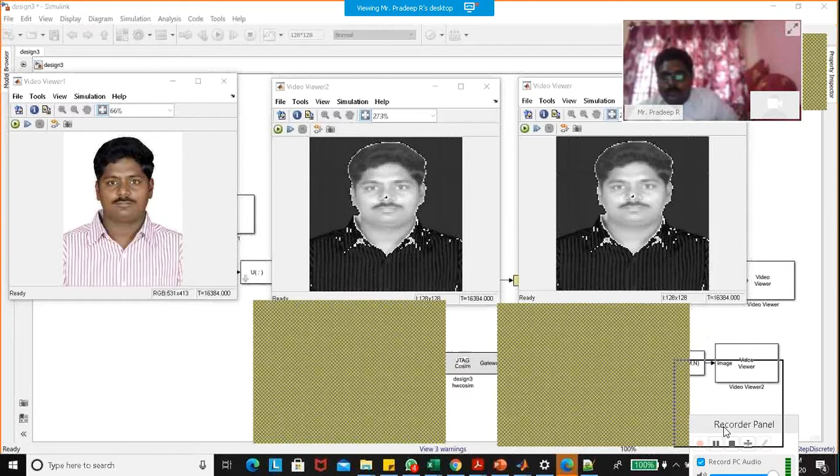I can do it. It's a recording somewhere, no? Right. Yeah, Mr. Pradeep, I suppose there are no queries. That's it, yes sir, thank you very much sir.

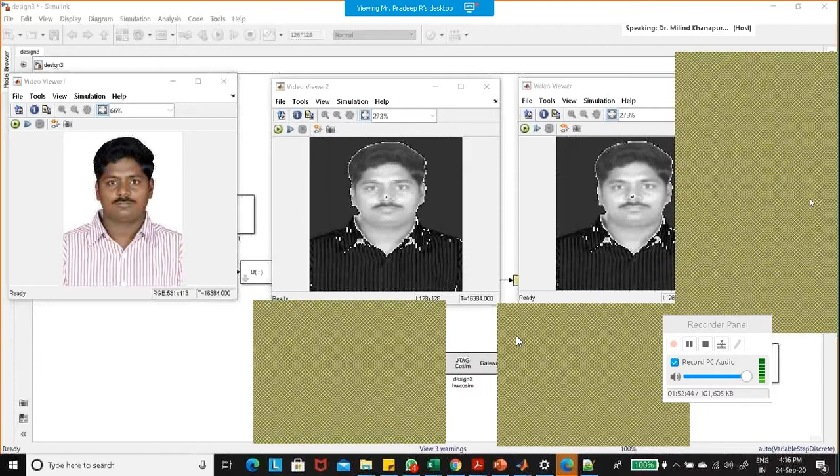So, have you finished from your end? Yes sir, I debugged into the FPGA, so my end is completed because we are concentrating on FPGA point of view and hardware implementation. My end is also completed. And can I wind up? Is it okay? Yes, please.

Thank you for giving this opportunity sir, from your college side, it is very helpful. I'm mentioning that use both the tools like MATLAB as well as Xilinx, take awareness and generate as many designs as possible to enhance that. How to debug into the FPGA is also very important because I'm mostly concentrating on VLSI sector. I was not good in image processing or video processing applications, but as part of my core ECE, I wanted to think about these types of designs. So I'm looking into these analysis and enhancements of design by using this hardware, and I wanted to do a lecture and help you people. I think this session is very useful to you, at least from my side.